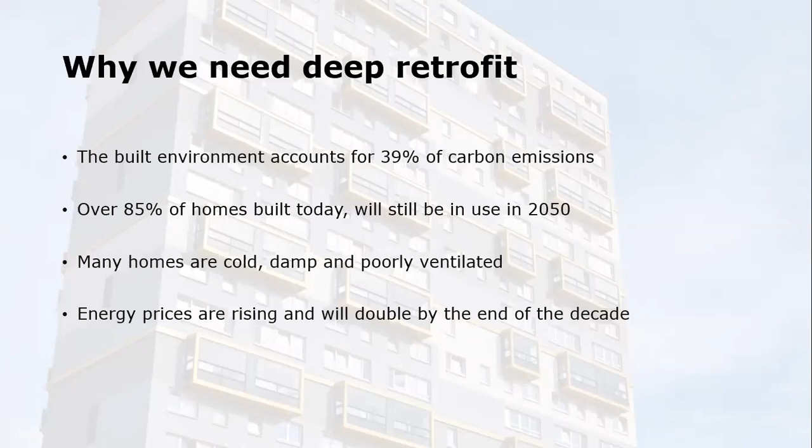For those tenants, we need to look at our homes through the prism of affordability as much as reducing carbon. The average price for energy costs in our authority just now is around £1,400, and these are predicted to double — that's from a quote within the Retrofit course, but I think it's BEIS as well. Over the coming decade, they will double.

Within social housing, we're slightly different from the rest of housing in that 63% of our tenants, figures from the DLG, are in receipt of housing benefit. That means that some of those tenants, in fact perhaps the majority, could have incomes between £3,800 and £7,800, excluding housing benefit. That puts them at risk, or certainly gives them less financial utility, but it puts them at risk of extreme fuel poverty, paying as much as maybe a quarter of their income to heat their home effectively.

Fast forward to 2030, and we expect energy bills, as I've said, to have doubled. Well, that's just really not sustainable — that we're going to ask people to pay upwards of £3,000 on limited incomes to heat their homes.

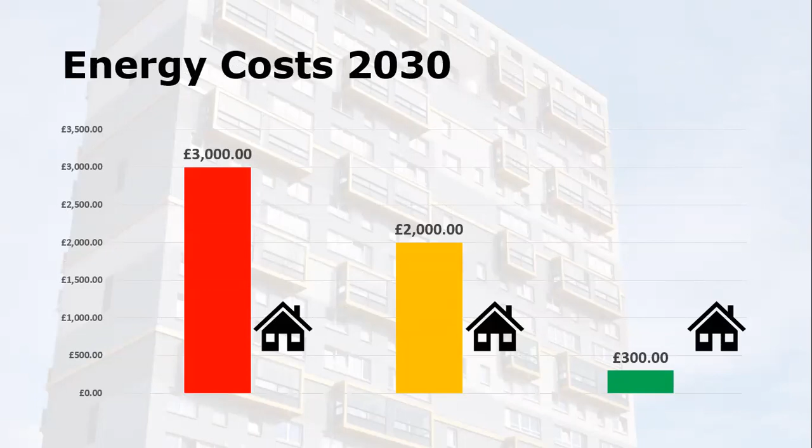So why do we need deep retrofit? Well, I think deep retrofit can save carbon and can mitigate fuel poverty, but it can also save carbon compared to demolition and new build. And it can provide homes that are healthier, which is a key point here, and more affordable to heat.

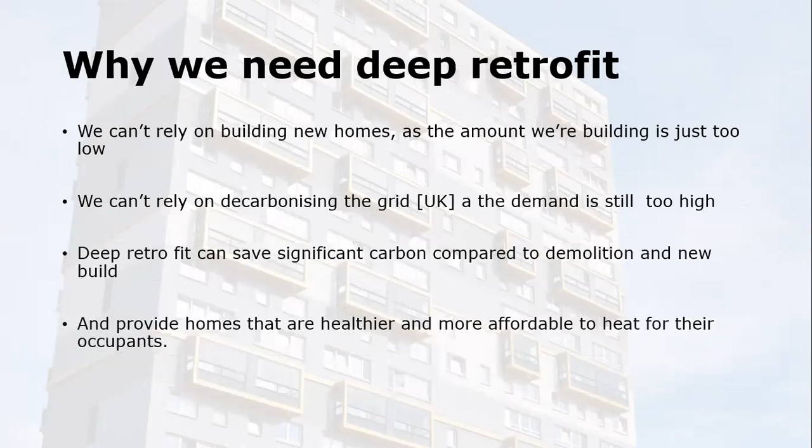A bit of background in terms of the policy landscape in Scotland. Scotland's placed an emphasis on energy efficiency and carbon reduction. Energy Efficient Scotland was a strategy that started back in 2018, but before then was kicked off by Chris Stark, as you probably know from the Climate Change Committee. It's an overarching strategy for the reduction of carbon across all housing, public and private, as well as commercial buildings. Heat for our buildings here in Scotland makes up about 50% of energy use — heat and cooling, I should add — and costs about 2.5 billion annually, so a significant amount of money being spent on heating and cooling our buildings.

EESSH, Energy Efficiency Standard for Social Housing, is the component part of Energy Efficient Scotland, and it imposes quite rigorous challenges and targets on RSLs and local authorities. Currently, that target is a SAP C rating, but this will change from December this year to a B rating for all socially rented homes by 2032. Now that's pretty challenging — it's 81, and in some cases comparable with new build over the last decade or so.

So can we afford deep retrofit? The argument we're often presented with internally and externally is that it's unaffordable. I'd like to turn the argument on its head. I don't think the question should be can we afford a holistic approach or deep retrofit, but rather can we afford not to? Can we afford business as usual? Will business as usual address climate change? Will it mitigate fuel poverty? And will it fundamentally deliver healthier homes for our tenants?

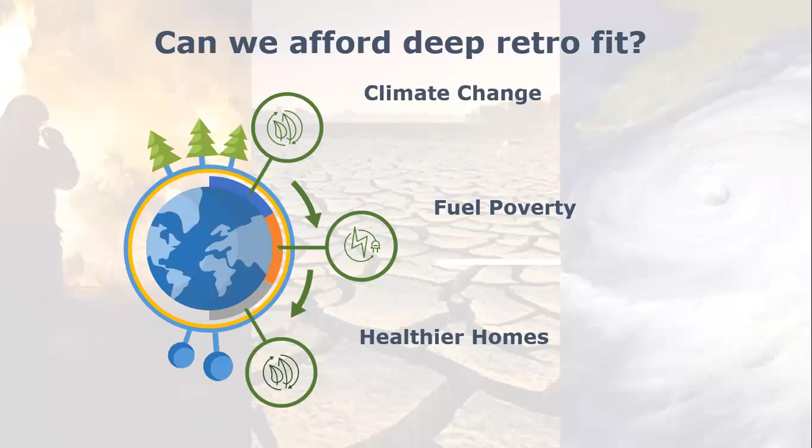I think business as usual won't solve climate change. I don't think it will mitigate fuel poverty. And personally, I don't think it's the best use of public money moving forward. Now, this may be controversial, but I don't think we can begin to eradicate fuel poverty or tackle climate change without looking at deep retrofit and infill solutions. Anything else is tinkering around the edges. We have significant problems that we have to face, and I think we need significant solutions in order to overcome them.

But we've not come to this position of realisation from working in a vacuum or within an ivory tower. I wanted to take you through some of the lessons we've learned the hard way, shown primarily through thermal imaging and heat loss, and highlight the journey we've been on over the last 7-8 years. These are highlighted in thermal imaging, but I'll also show you some internal environmental issues as a result.

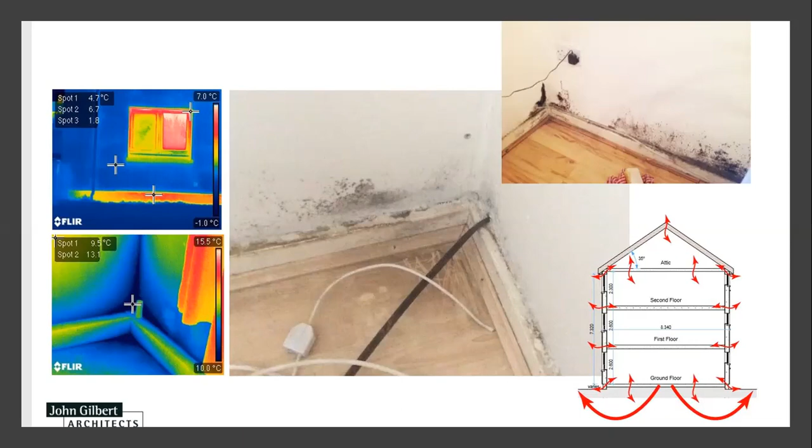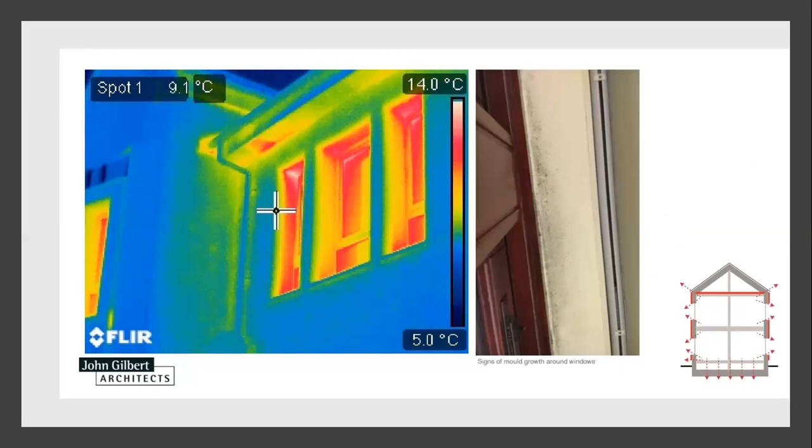A similar image shows the windows, the reveals around the windows, where we haven't insulated those reveals - again, a practice that should be eradicated past 2035. It shows how that can have an impact on heat being drawn to windows and thermal heat loss.

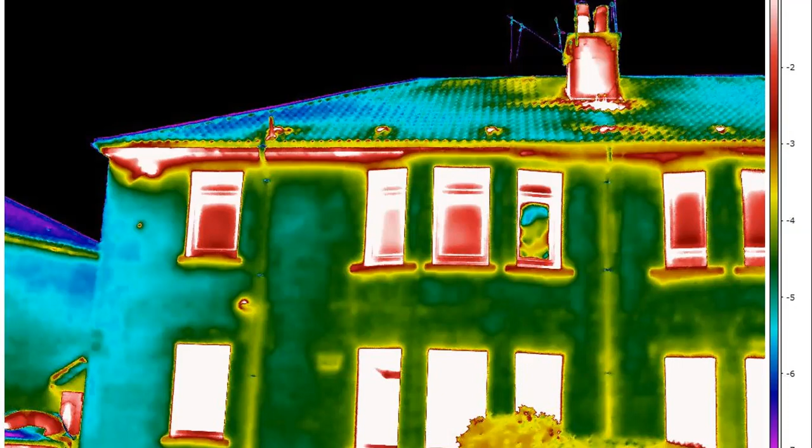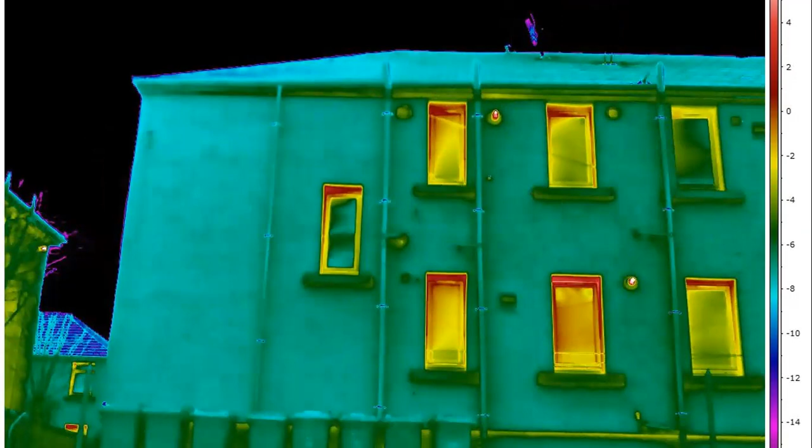And I'll show you the practice that we install EWI in a minute or so.

So the case for deep retrofit, for me, there are 4 key strands that we need to advocate and educate others within our organisations, and they're around future-proofing your homes, lower energy costs, and healthier homes, which is really fundamental here. It's an area where, as asset managers, we tend to look more about the fabric and not about the health benefits for tenants, but healthier homes for those tenants and value for money.

Value for money over the long term and not the short term. Value for money over 30-year capital plans rather than 2 or 3 year programs or cheapest contractor. Value for money over reduced maintenance costs and perhaps even fewer tenancy changes, meaning fewer void processes. Value for money, we don't have to keep going back to upgrade homes as standards change, that we aim for a high standard at the start and we install that.

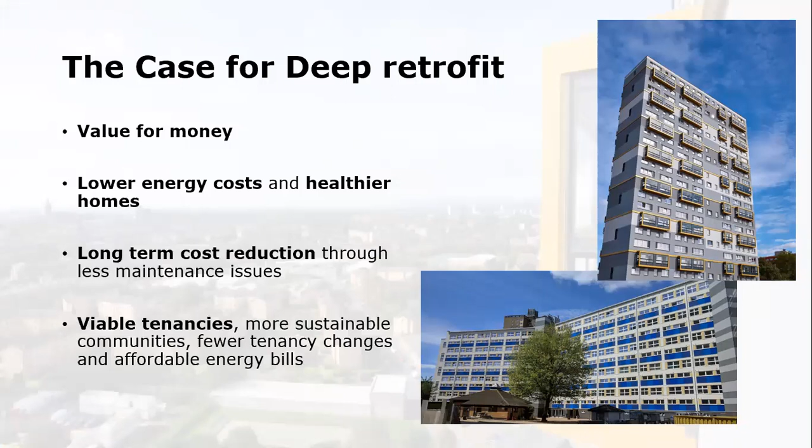Value for money is sustainable homes and sustainable tenancies, as I've said, that no matter who is housed in that home and their financial income, they can heat their home. And then with the money saved, they can spend on things that matter, perhaps education, food, clothing.

So we've developed a standard that focuses on a holistic approach to our stock, and it recognises the importance of air tightness and mechanical ventilation. But fundamental to this standard is that we control the design and specification for the works.

It's difficult to overstate this point. As social landlords who maintain our homes, long after defects liability has expired, we need to control what it is we are buying, and we think that we can only do this through design and specification and through running or managing projects.

And we think that we can develop and implement deep retrofit, or indeed even EnerPHit, as part of a 2-stage process. And I'll come on to that and show you just now.

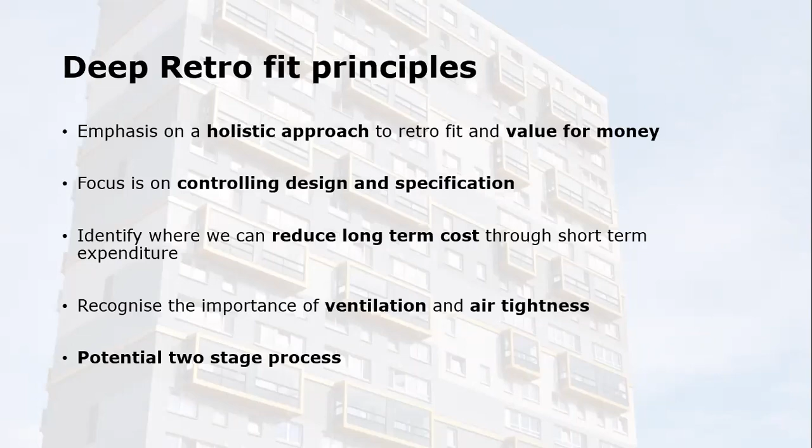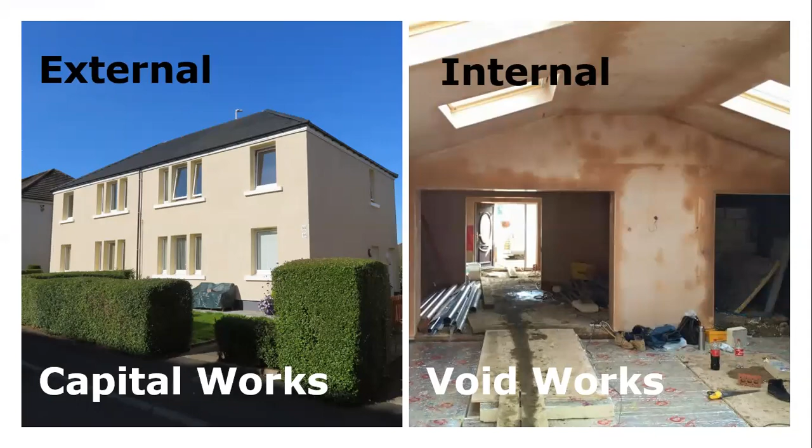Well, the capital costs are more than standard retrofit. This can be shared over an external and internal fit out. We can look at capital works initially, or a compliant deep retrofit external approach, as well as an internal programme, perhaps even at void stage where there's minimal disruption or no tenant disruption, and it can be an incremental programme that follows on the back of an external capital works programme.

Our external works programme is compliant with EnerPHit. It looks at a range of measures, both energy efficiency as well as asset management, that reduce that capital spend over the 30 years. It is more expensive up front, but we believe it is actually less expensive over the 30-year plan. And that's highlighted here in some of the pictures I'm going to show you, where we remove chimneys now as standard, and that cuts down on long-term costs.

I can go into more detail on this in the question and answer session with David after this. We look at a higher specification of render, which should give us a 30-year life. It's a silicone render we use these days. We look at minimising thermal bridging.

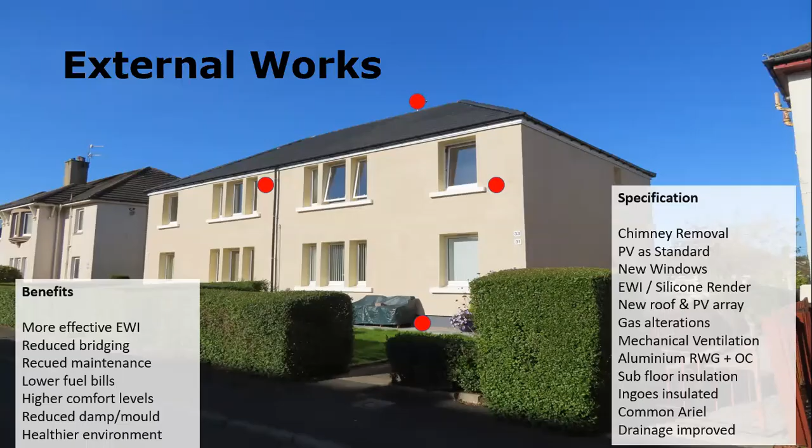We install new windows wherever possible, in order that we don't go back and break insulation at a later stage as a result. We specify aluminium rainwater goods, a variety of different measures that give us a cleaner, more holistic approach that mitigate bridging, and that should provide warmer, healthier homes, and also fundamentally, reduce the dampness and mould that we have in homes, or reduce the likelihood of that, and provide a healthier environment for our tenants. This is just an example of the type of standard that we have now as standard. As you can see here, it's a much cleaner effect.

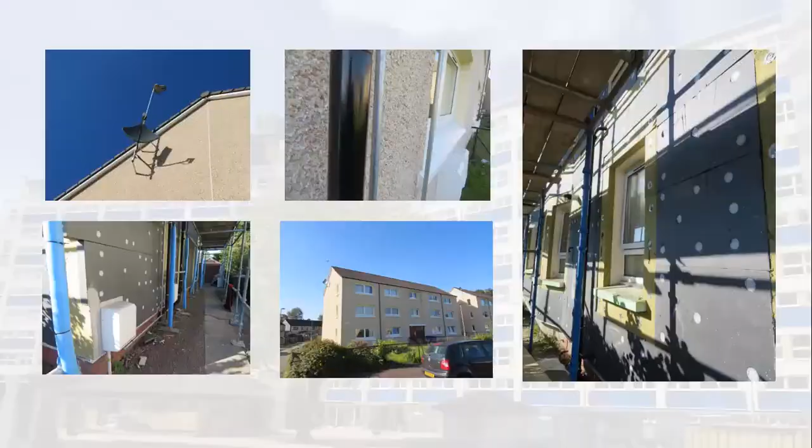Some individual examples of the process on site. You can see in the bottom left-hand corner where we've removed gas meter boxes, or removed and extended them. We do that with all pipe work.

Where we look at communal aerials, we're not looking at puncturing the system through individual aerials or satellite dishes. We use marine grade aluminium now for all rainwater goods, which again is slightly more expensive up front, but we think over a 30-year period provides much more value for money.

And you can see in the right-hand slide where we use a Rockwool system. We use an EPS board mainly, but we use a Rockwool system for fireproofing.

This is just some slides. I'll cover this off briefly, but it's looking at some of the practice and process inside around air tightness and ventilation, and it's a crucial element you have to get right. This actually comes from not one of ours, but I've stolen this from Jeff Colley's Passive House Plus magazine with his blessing. Air tightness is critical to deep retrofit and critical to EnerPHit.

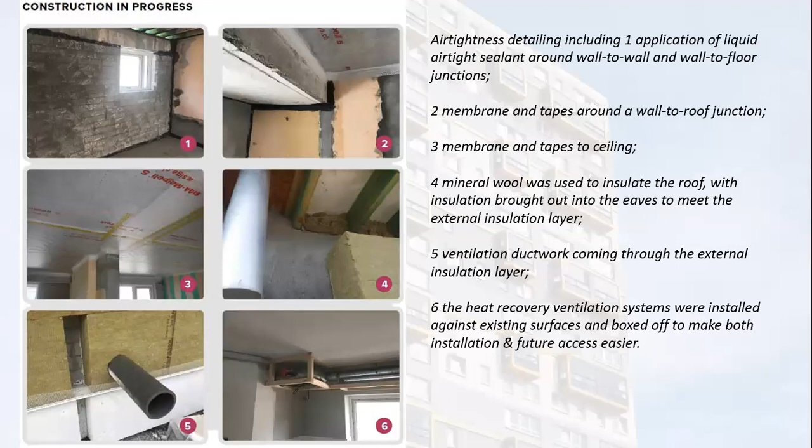So what can we do? What can we do as practitioners? What can we do as landlords? We think there is a 6-stage process we need to look at. We need to educate people on the benefits of deep retrofit and why it's viable over that 30-year period, not over a 2-year or 3-year cost model, why it's sustainable in the long term, why we need it. We need to become advocates of change within our organisations.

We need to promote the values of deep retrofit. We need to retain control, as the earlier slide suggested. I think one of the things local authorities have done is cede control of design, specification, and delivery of works over the last 30 years. I think Grenfell shows you perhaps the worst example of that. We need to retain control of design, specification, and delivery of works, and control that in terms of what we want as a product over the long term.

We need to collaborate in partnership with each other and share lessons. One of the things our sector does not do is collaborate. We don't talk to each other, and the chances are many of you watching this presentation have exactly the same type of stock that we do, in different percentages. So we have the same problems, we need the same solutions. We should talk and collaborate more on how we develop those.